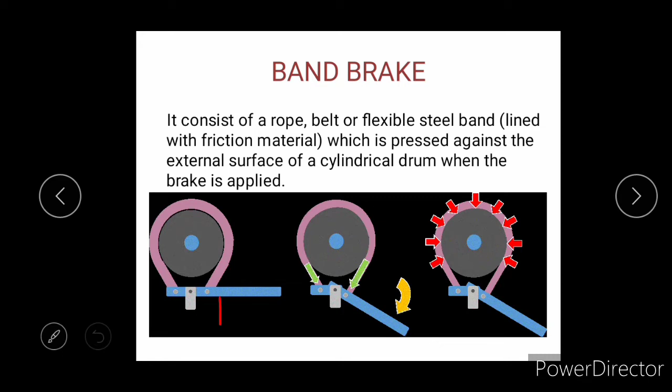In this lever there are 3 points: point number 1 here, point number 2 this one, and point number 3 this one. The two sides of the band are attached on both sides of the fulcrum. This middle point is known as the fulcrum. So the two ends of the band, end number 1 and number 2, are attached on either side of the fulcrum.

Let the middle point be the fulcrum O. Point number 1 is one end of the band, point number 2 is the other end of the band, and point O is the fulcrum of this lever. Band brakes in which the two ends of the band are attached on either side of the fulcrum are known as differential band brakes.

Sometimes one end of the band is attached to the fulcrum itself. That type is known as a simple band brake. Listen carefully again: when one end of the band is attached to the fulcrum, it is known as a simple band brake, and when both ends are on either side of the fulcrum, it is known as a differential band brake. So I think you understand the construction of the differential band brake and simple band brake.

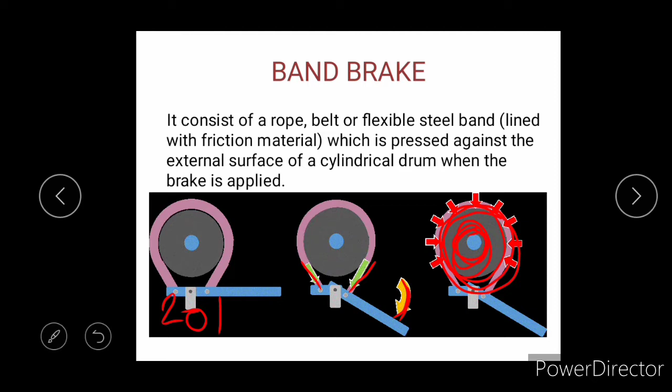In the next slide we are going to calculate the braking torque and applied effort in a simple band brake. As I told you, in a simple band brake one end of the band or belt is attached to the fulcrum itself. Here in this figure, OBC is a lever. Point O is the fulcrum. See, this is point O.

Point B is where the other end of the band is attached, and at point C we have applied effort, and the direction of the applied effort is upward. Now let us discuss what terms are used over here.

This is your drum. The inside one is the drum, the outside one is the band. The direction is given here; the drum is moving in the clockwise direction. See the point L, the dotted line from L to the center of this drum, and from the center to point M. So M to L is the angle of lap.

Small t is the thickness of the, here look at the figure, t. This t is the thickness of the belt or band. So if we talk about effective radius, half of the thickness of the band plus the radius of the wheel is known as the effective radius of the drum.

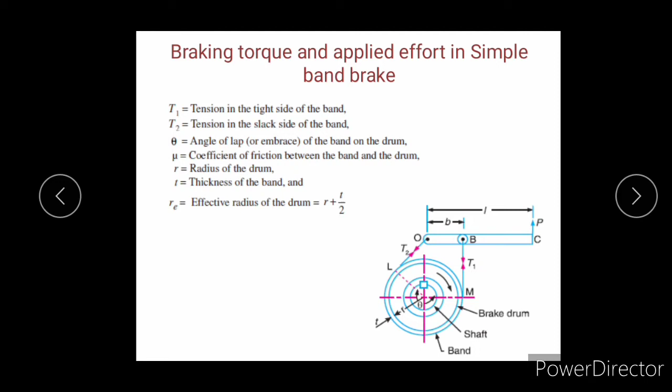Now T1 is the tension in the tight side of the band, and T2 is the tension in the slack side of the band. So this is the introduction, or the terms used in this analysis. Now move forward. Again the same figure is here. One more thing is there: the distance between the fulcrum and the applied effort is small l, and the distance between point B and fulcrum O is small b. Remember this.

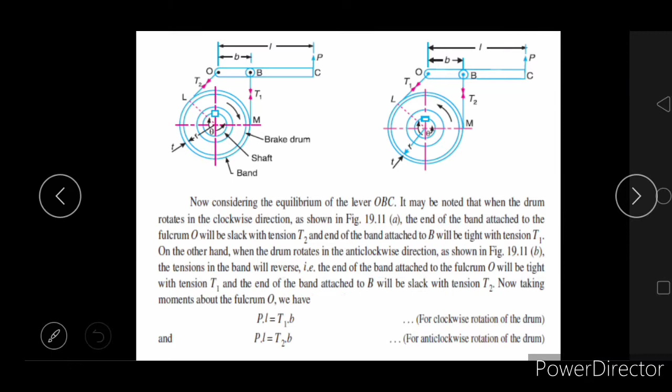So the tension T1 acting on the lever is in downward direction, the effort P is in upward direction. Here also the force T2 is in outward direction from the fulcrum O. So if we make a free body diagram of the forces, this is your applied effort P, here it is T1, and here at point O it will be T2. So this is your point 2.

Now the moment of a force which passes through the same point about which we are taking the moment will be 0. It means the perpendicular distance here is 0, so T2 into 0 will have 0 moment. We are taking the moment about point O, and this is the point O. P is in upward direction, so the moment of effort P about O will be P into L.

Look here, the applied effort P and the perpendicular distance of the line of action of this effort P gives P into L. P into L in which direction? In anti-clockwise direction. You have to take the moment in the direction of the force while including the point about which you are going to take the moment.

So you are taking the moment about point O. The direction of force is upward, so go upward and move towards the fulcrum O. The direction you will see is anti-clockwise direction. Let us assume anti-clockwise direction is negative, and the clockwise direction is positive. In this way this will be minus P into L, and this T1 into this distance. What is this distance? This is b, T1 into b.

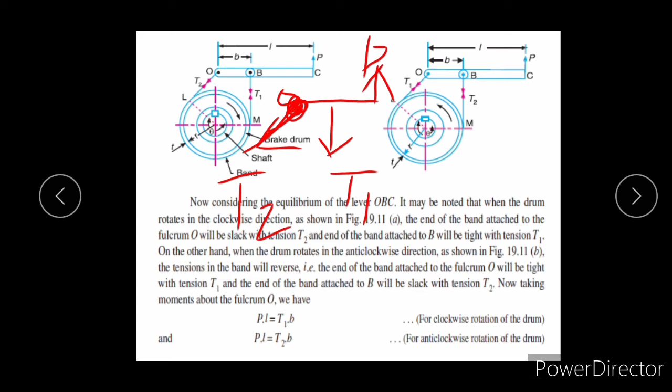See, what are self-locking brakes? These are actually locked when the brakes are not applied. It means the brakes are applied when you don't press the pedal or you don't pull any lever. Without application of any force, the brakes are applied. Such brakes are self-locking brakes. The name indicates self-locking means without any effort the brake has been applied. This is the meaning of self-locking, right?

For example, when you are lowering some heavy load from a hoist, the operator pushes a pedal or pulls a lever. When he pulls a lever or pushes a pedal, the brakes are disengaged. It is the opposite. When the vehicle is moving and we press the pedal, the brakes are applied. But in case of self-locking brakes, when you press the pedal or pull the lever, the brakes are disengaged.

When the brakes are disengaged, the load will come down. As you release the lever or the pedal, the brakes will be applied. Such brakes are known as self-locking brakes, and the condition of self-locking was discussed earlier for the shoe brake. Now let us discuss the self-locking condition for a band brake. As I told you, if P becomes 0 or negative, that means P is less than or equal to 0, you will find a case of self-locking brakes.

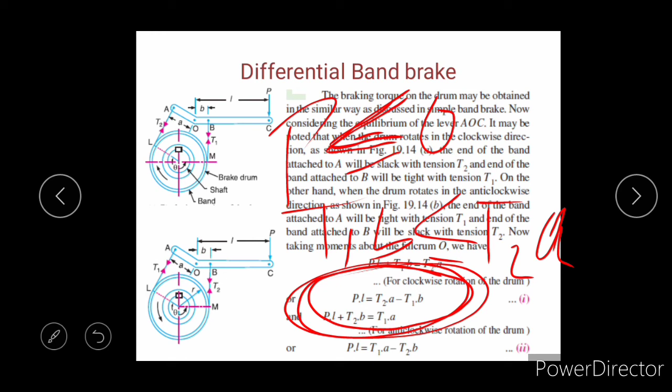So in equation 1, put P less than or equal to 0. You will find T2·a is less than or equal to T1·b. So this will be the condition of self-locking. We are going to look at this self-locking condition in our next slide.

Condition for self-locking of a band brake: T2·a is less than or equal to T1·b. Or T2/T1 is less than or equal to b/a. This is the condition for self-locking in band brakes. For anti-clockwise rotation, put P less than or equal to 0 and you will get T1·a is less than or equal to T2·b. This is the condition for self-locking with anti-clockwise motion of the drum. I think you have understood the concept of self-locking and how to find the condition of self-locking for a band brake.

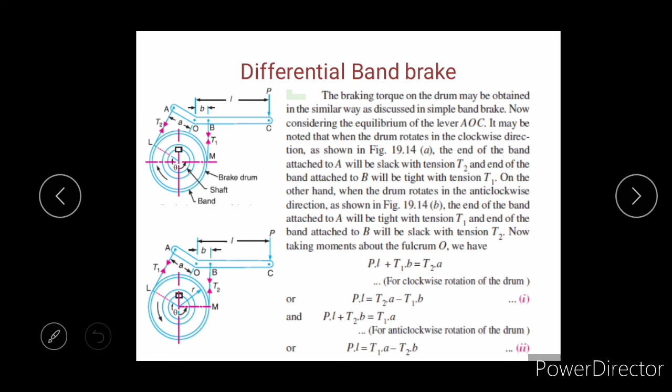One more thing. We have discussed the case a greater than b. If a becomes less than b, the applied effort will be in the upward direction. So there will also be two cases: case 1, a less than b, applied effort upward, and wheel moving clockwise. Case 2, a less than b, applied effort upward, and wheel moving anti-clockwise.

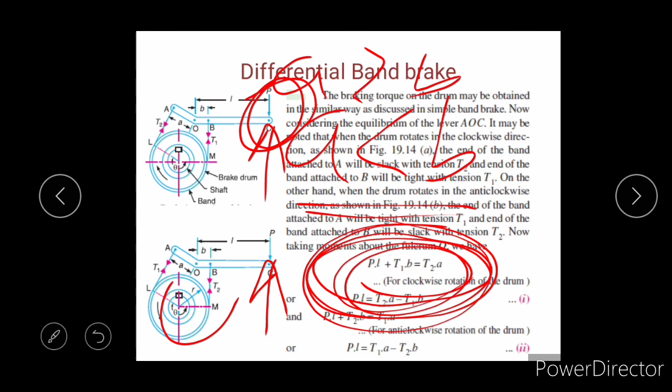You can find the applied effort by the same equilibrium equation. Just use ΣM = 0 and find the condition of self-locking for a differential band brake when a is less than b. This is your homework, guys. Try it and you will definitely be more confident. Do numericals on this. This topic has been completed from my side.

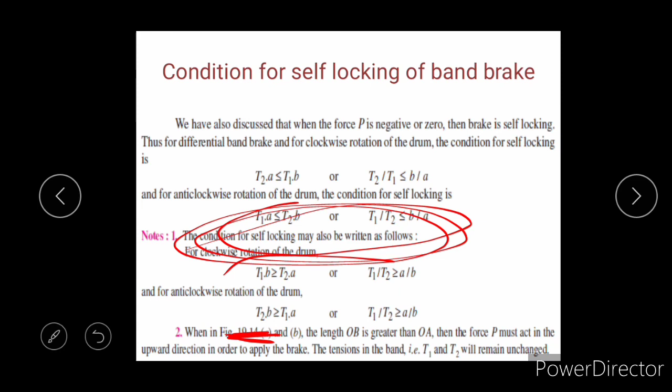One more thing: figure 19.14 a and b and all these slides are taken from the book Theory of Machines by Dr. R.S. Khurmi. I hope you have got the idea of the band brake, braking torque in band brake, applied effort in band brake, and the concept of self-locking of shoe brake and band brake.